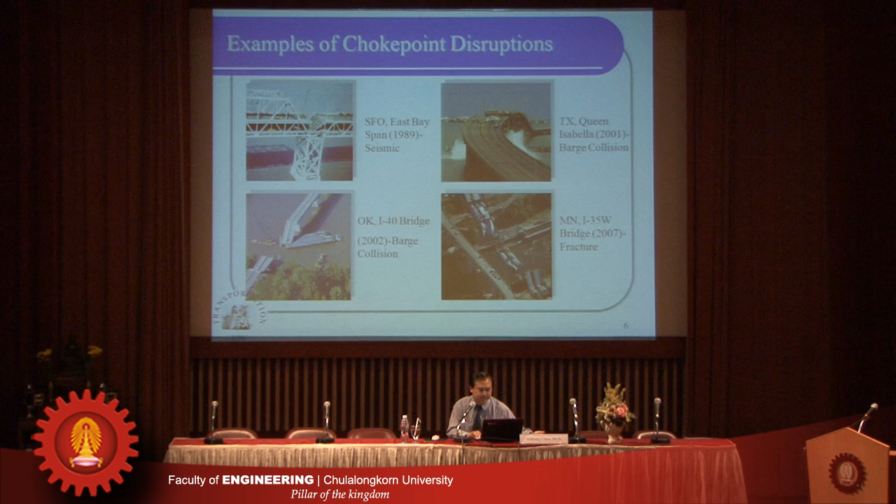Yeah, so these are potential choke points that can cause quite a bit of delay. I will focus mainly on this kind of choke point disruption for the freight analysis. Okay, so here is the research framework.

To do freight analysis, you basically need two types of input. One is the truck origin destination trip table, and this one is actually very difficult to get.

Later on, I'll show you a method of how to estimate this truck OD trip table by using an existing database in the United States called the FAF, which stands for Freight Analysis Framework. This is probably the one that will have the most error. Dr. Park talked about the significance of this truck OD table in his talk, and during the coffee break I asked him how they actually got it.

There are two ways: one is by commodity flow, and the other is based on truck trips. It depends on what kind of data you have — you may use either one or both. Even if you use both of them, there's still going to be a lot of error.

What I will show today is one way of estimating this using commodity flow data provided by the Federal Highway Administration in the United States. We have to make a lot of assumptions and also make use of a lot of other databases to actually estimate this. The other input is the transportation choke point.

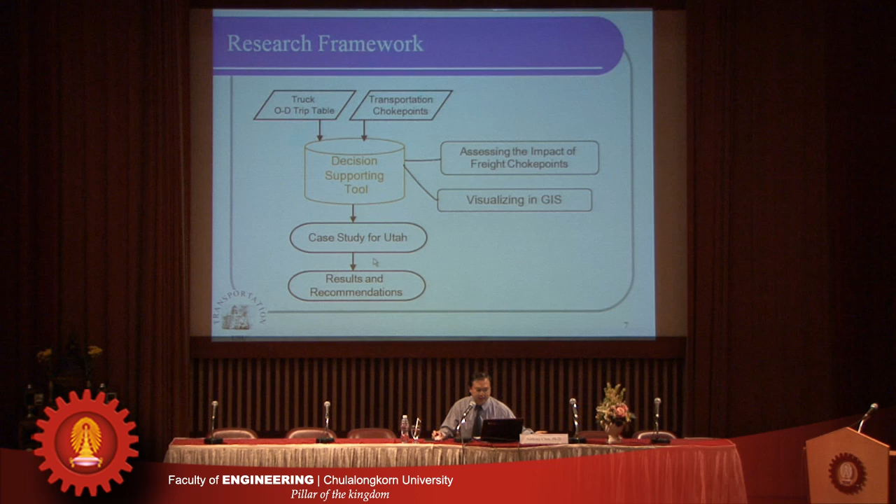We will be using a case study for Utah, and based on that case study, we can make some recommendations to the DOT.

Okay, so this is what I was talking about — how to estimate a truck OD trip table from a commodity flow database. There are actually a number of steps we have to carry out, and basically the database we are using is called FAF.

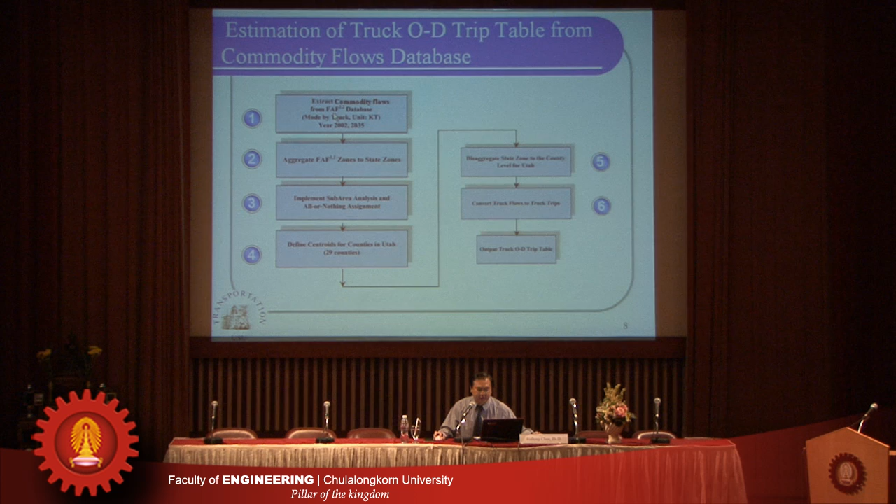So I have another slide for that. This is the Freight Analysis Framework database, an integrated database of national and statewide data on freight shipments, categorized by many different things like origin and destination, value, weight, mode of transport, distance shipped, and ton-miles of commodity shipped. So there's a lot of data in here.

The one we're using is actually by value and by weight, to estimate the truck OD. It's conducted once every 5 years, the same as in the Korea case. The one I'm using is from 2002, and the 2007 version was just released this year.

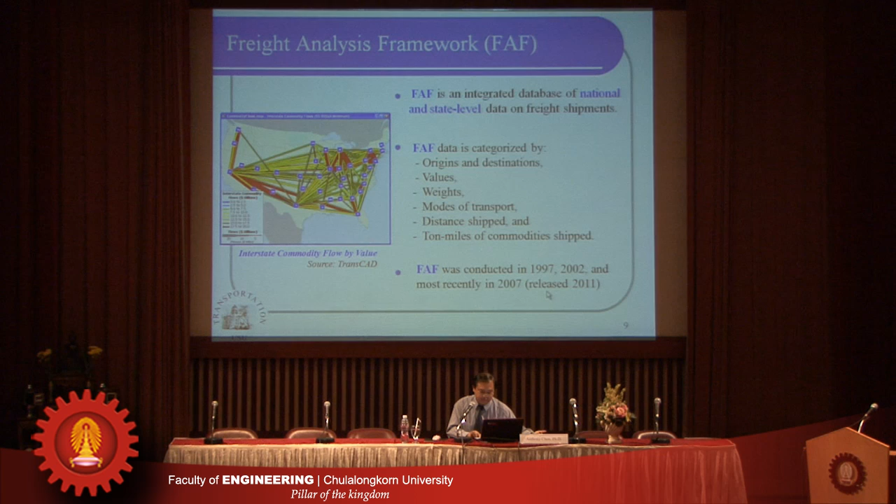So the first step is to extract the FAF commodity flow by weight, in terms of thousands of tons. There are different modes, such as domestic, water, or border, and what we're interested in is mostly the domestic one.

So we extract the domestic flow using only the truck mode. Remember, there are many different modes, so we only extract the truck mode from this particular database, for all the states, and then we convert that to just a given state, Utah.

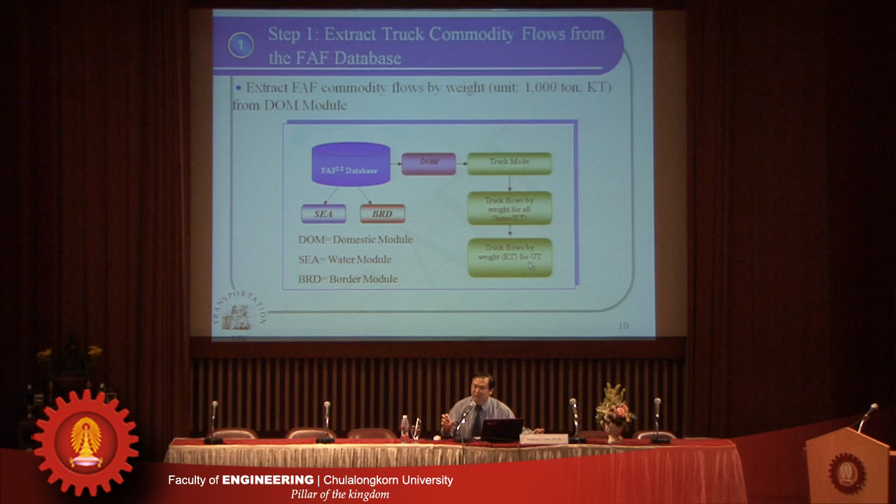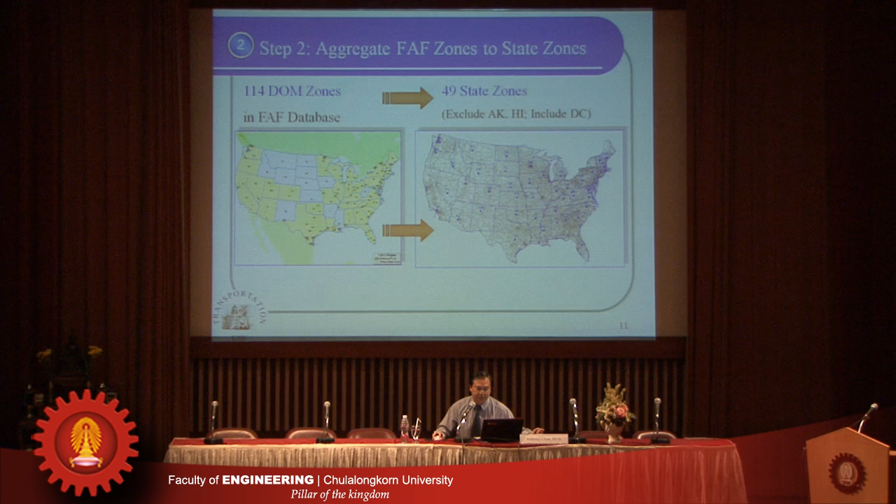In the original FAF database, there are 114 domestic zones. What we do is first convert that to 49 state zones. This excludes Alaska and Hawaii, but includes Washington, D.C. as another state zone — that's why there are 49 instead of 48.

And then what we need to do is estimate the flow for just one state, which is Utah. To do this, we need to estimate 4 different types of truck commodity flow.

Basically, there's I to I, which is within Utah as both origin and destination. Then I to E and E to I, which is from Utah going outside, and from outside coming into Utah — these we can obtain from the FAF commodity flow. The only one we don't have is traffic passing through Utah, the E to E, so we have to develop a method to estimate these through trips.

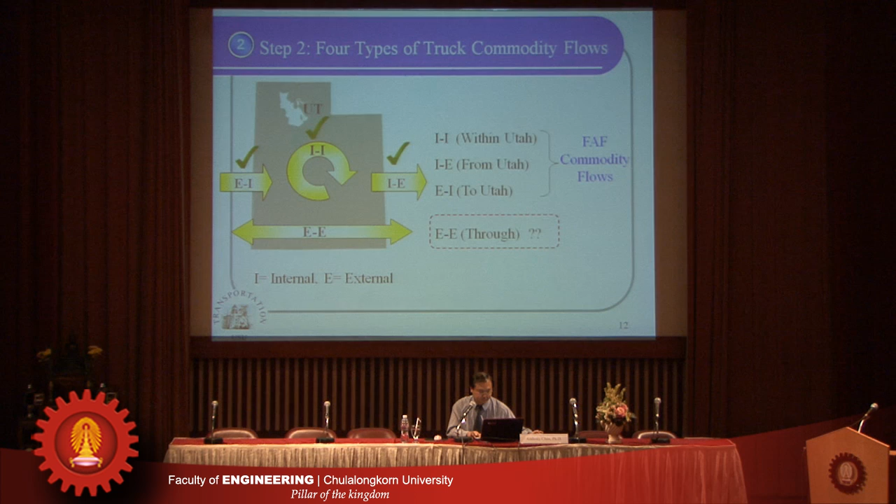Okay, let me talk about the matrix first. Here, the internal Utah is just one zone, so the size of this matrix is just 1 to 1. And then we have 48 other states, so the I to E is 1 to 48, and the E to I is 48 to 1. And the through trips is 48 to 48.

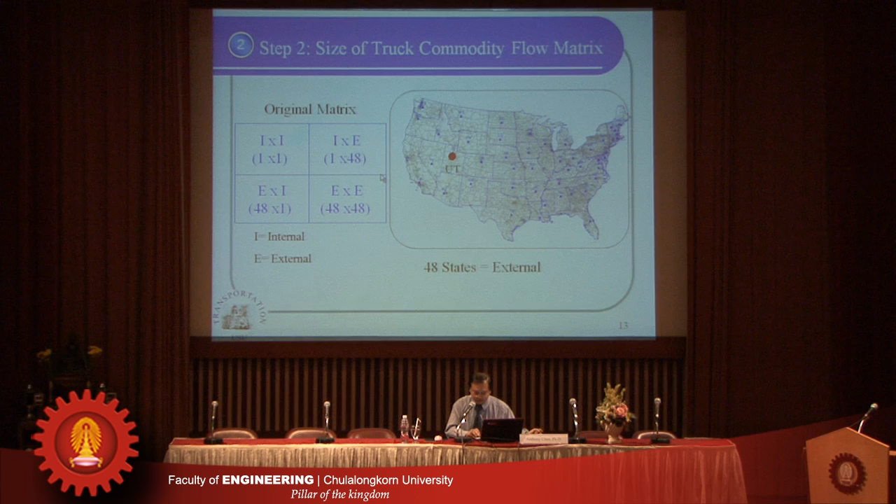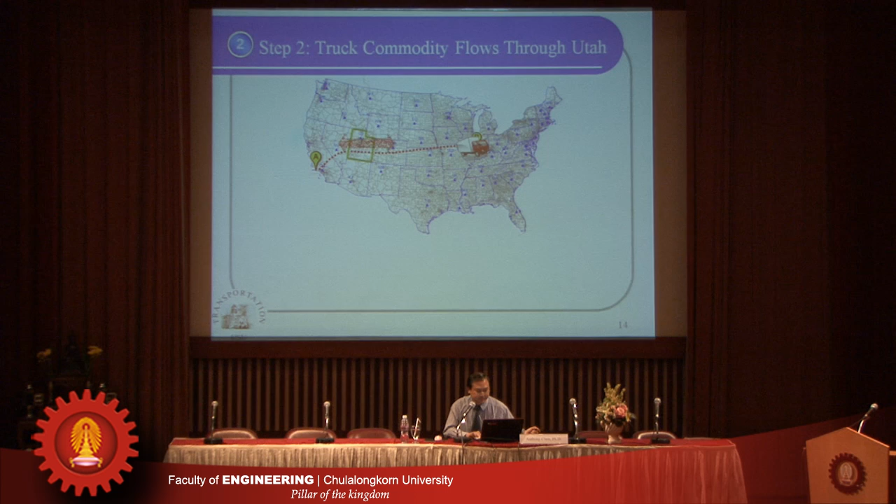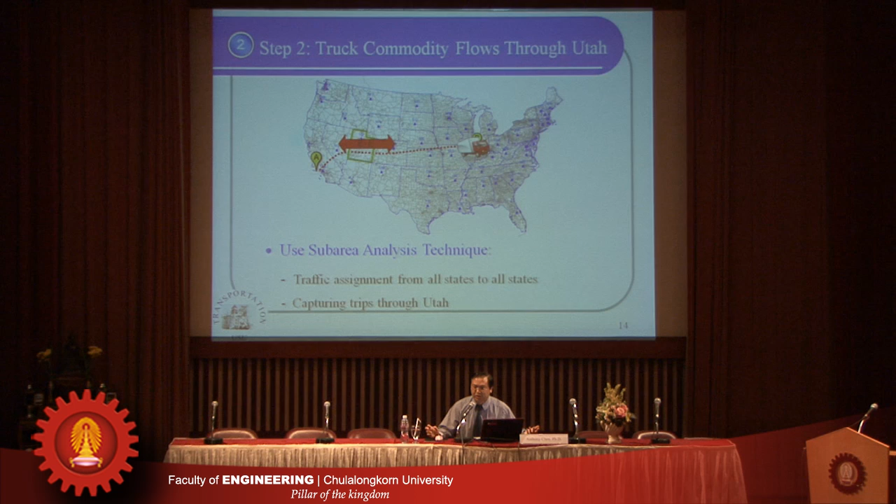So we need to estimate this first. The way that we did it is we look at all possible combinations of state as the origin and destination and do a traffic assignment. This way we capture the through trips. So basically the methodology we're using is a traffic assignment, which is a standard step in the 4-step forecasting process, the last step. You can use any software to do that.

Then we run a sub-area analysis. To run the sub-area analysis, these 48 states got aggregated into 19 external zones. These are the points that go into Utah. So we use a software called TransCAD, and they will estimate these external stations within the software, so you don't need to define it.

So now our matrix is basically 20 by 20. What we need to do next is disaggregate this, because if you only have 1 point to represent the whole state, you're not going to represent the truck trips well. So we have to disaggregate this.

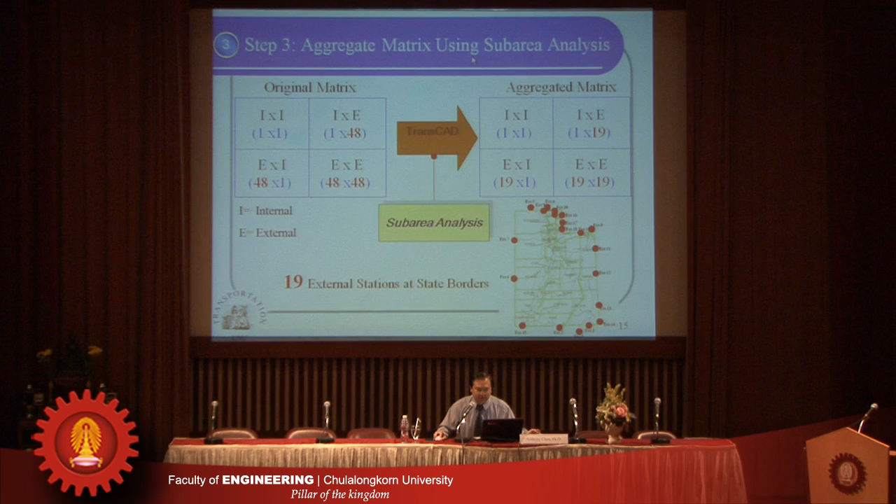And the way we do it is to disaggregate according to county in Utah. So just like in Thailand, I guess there are how many provinces? 76 provinces? So you would disaggregate into 76 provinces.

Okay, so in Utah there are 29 counties. So the Utah state originally was 1 to 1, now it got disaggregated to 29 by 29. So basically we have 1 zone per county. Right now the final matrix size is 19 plus 29, so it's 48. So the whole matrix is 48 by 48.

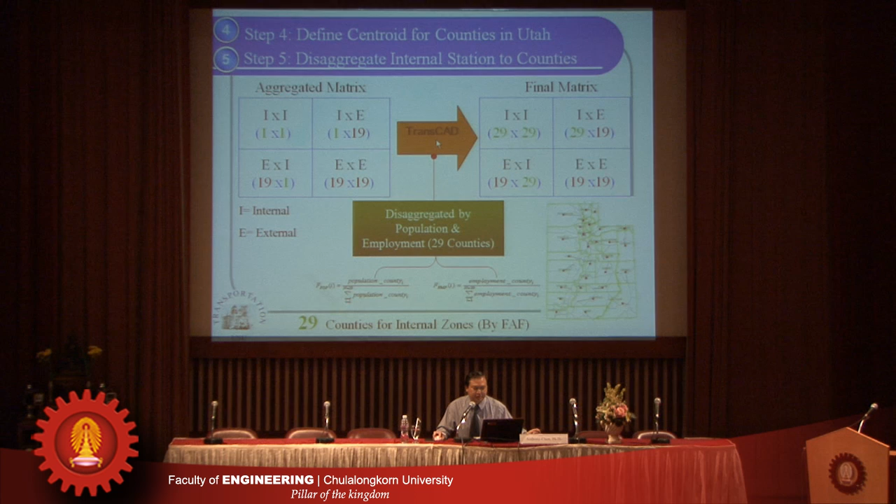And to do that, what we need to do is use the database from the Utah Governor's Office to get the population and also the employment. Using this database from the state of Utah, we're able to disaggregate according to the population and employment.

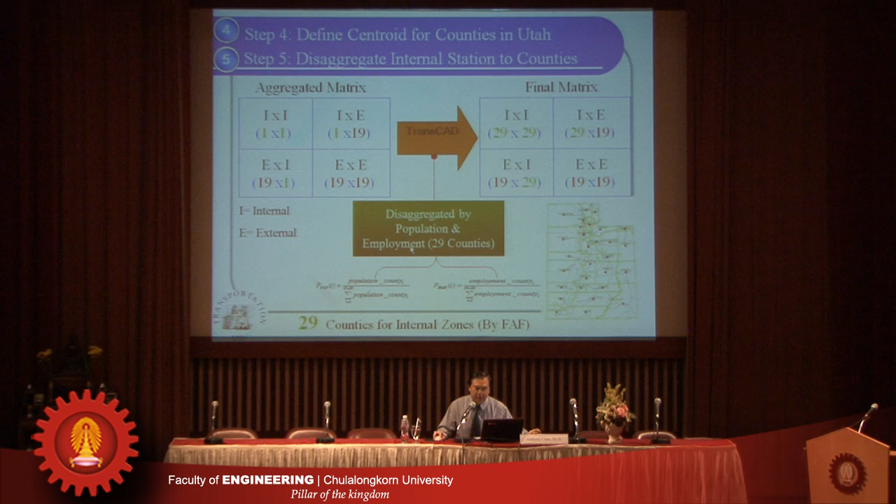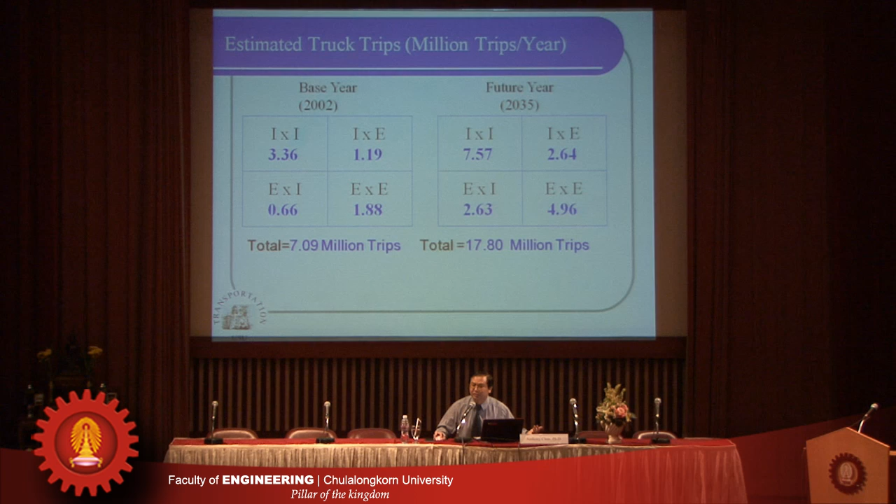And then we run that estimation. So for the base year, these are basically the number of trips per year. In the base year 2002, the total is about 7 million trips, and within the state of Utah is about half of it. For the future year 2035, the total number of trips is more than double. Recall in the beginning I showed you the increase is 150% for the whole United States, but for Utah it's more than 150% increase, so it's higher than the national average. So Utah is concerned about this increase in truck traffic in the state.

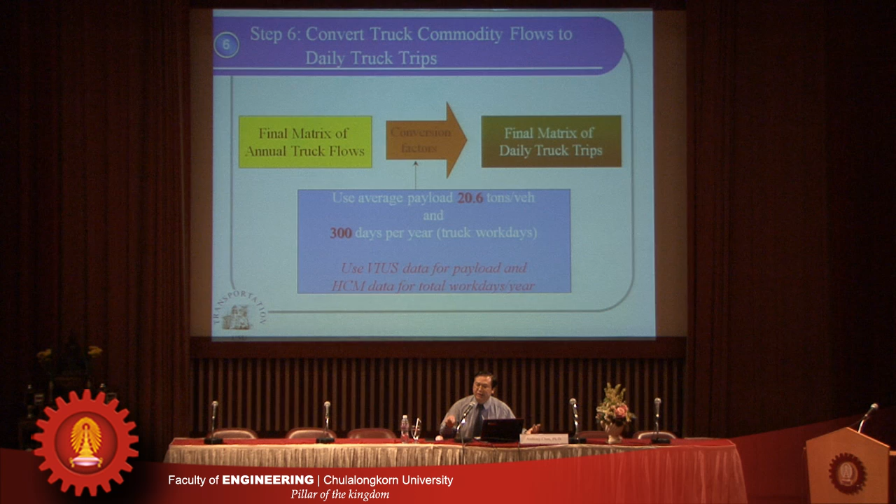Okay, so that is still in commodity flow. The next thing we have to convert to is the truck trips. So up to step 5, everything is still by commodity by weight. This step is to convert the commodity flows to the actual daily truck trips made in Utah.

In order to do that, we have to use again 2 different databases. One is the VIUS data, which gives you the payload. In the US, when you enter a state you have to go through a port of entry, and the truck has to be checked and weighed—there's a weigh-in-motion to weigh how much the truck weighs. What we did is use the average weight, which is 20.6 tons per vehicle, to convert the commodity flow. The previous slide showed annual commodity flow trips, so we have to convert it to daily trips.

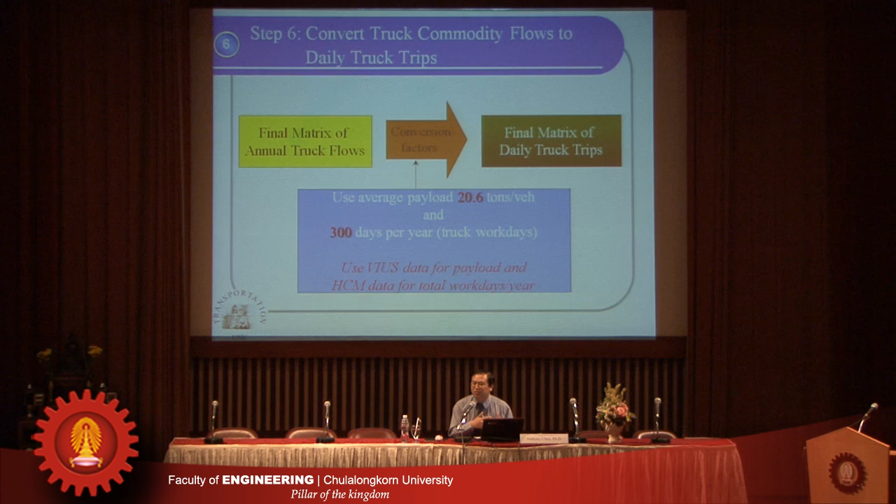And according to the Highway Capacity Manual, the total work days per year is 300. I don't know exactly how they came up with that number, but that was suggested by the Highway Capacity Manual. So you can see to do this procedure we have to use many different databases and make a lot of assumptions.

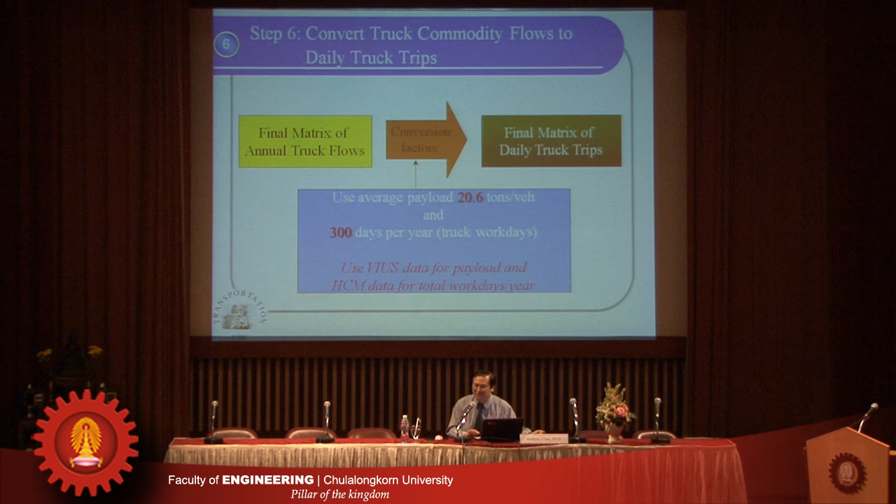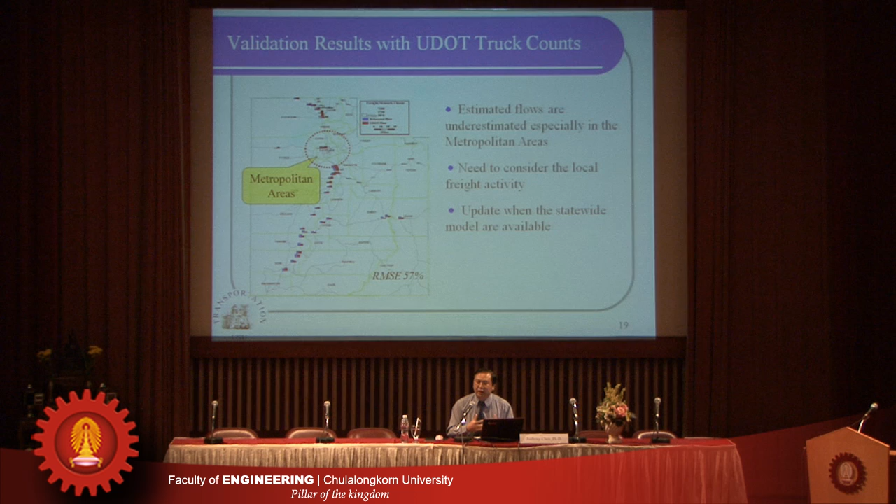And this is the same as in Korea, like interregional, you're using commodity flow, and within the urban area, you're actually using truck flow, right? So I think there is a need to actually integrate these two approaches, and we're thinking of a way to do that by integrating both the commodity flow that we obtain from the national database, and also the truck count that we obtain from the state DOT.

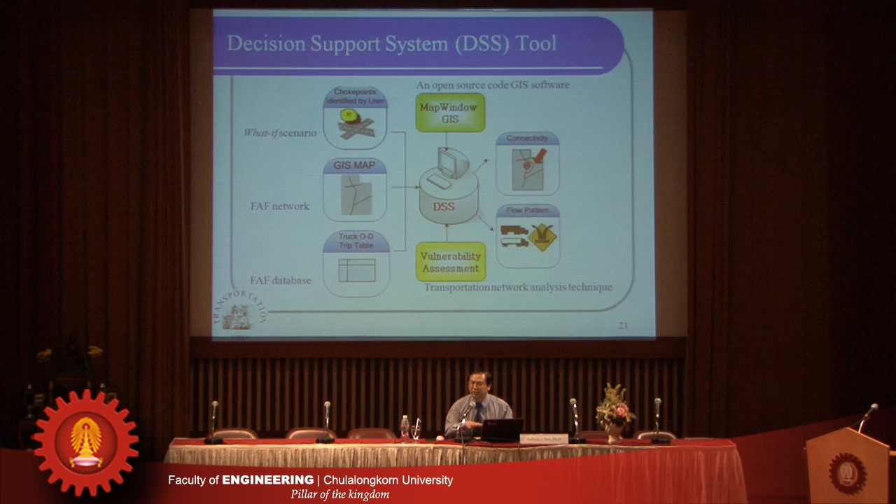And the way we're going to evaluate the vulnerability, basically we will be using two measures. One is connectivity - what this means is that if certain bridges or roads are disrupted, can I still go from point A to point B, or what is the detour route? And the second one is the flow pattern, which will make use of the truck OD trip table. So we will assess, if there is a disruption, how does it change the flow pattern of the truck? These two are actually complementing each other.

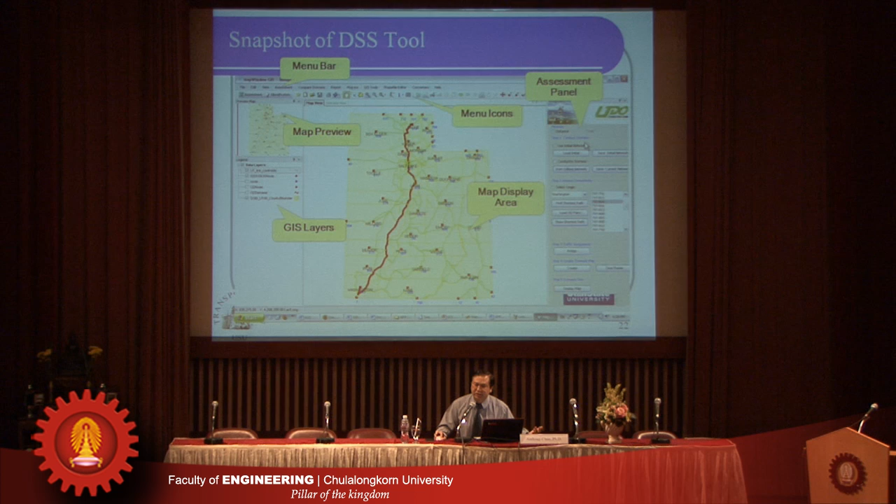So this is just a snapshot of the decision support tool. You can see that it's just like any commercial package - you have your menu bar here, your menu icons, your preview map here, and this is the different GIS layers, and this is the main display area. Over here on the right is the assessment panel, so you can do different analysis, like whether it's connectivity or freight flow pattern change.

And as I said, the decision support tool has full functionality, so when you want to change some attribute of a link, like say for example if you want this link to be a choke point, all you have to do is click on it and then a table will pop up, and then you go to this column and change it from enable to disable, which means that link will not be available for the analysis. Okay, and then you just save it. So the input is actually quite user-friendly.

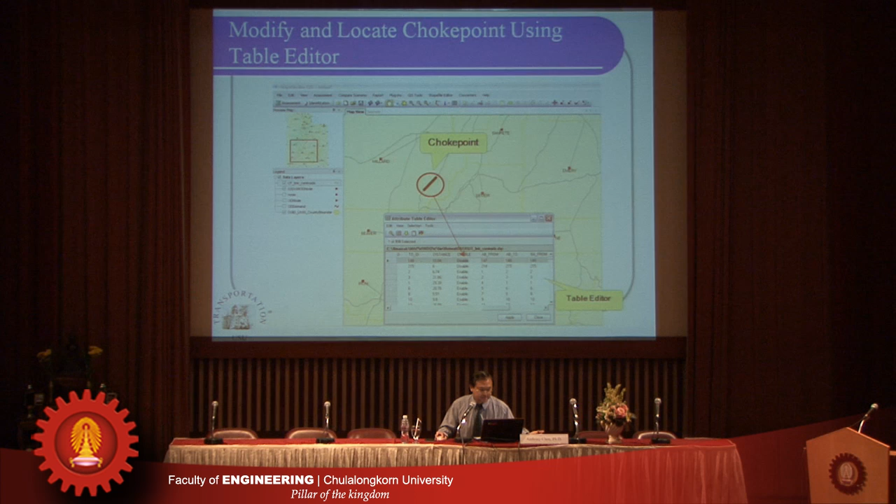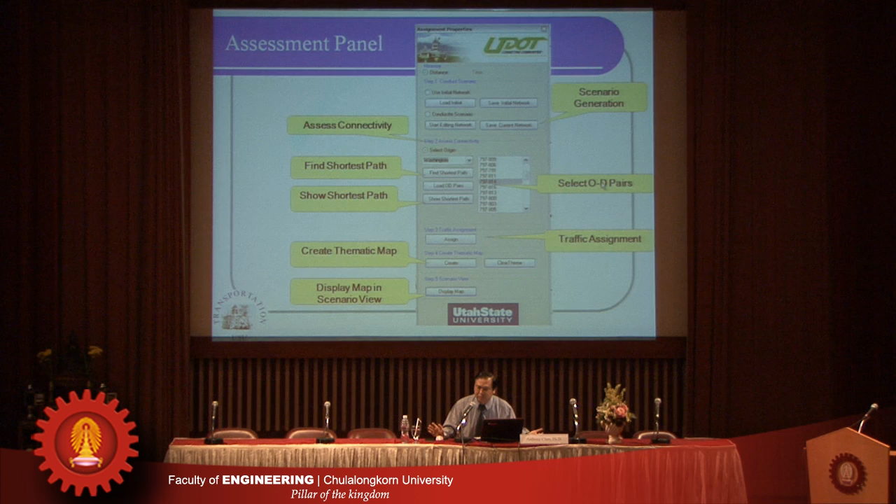And this is the assessment panel. Basically, there will be a number of steps, and what you have to do is just follow step by step. And you can also view, say for example, you want to view a particular origin destination pair - what is the route, what is the detour route, you can also do that. So I'll show you that.

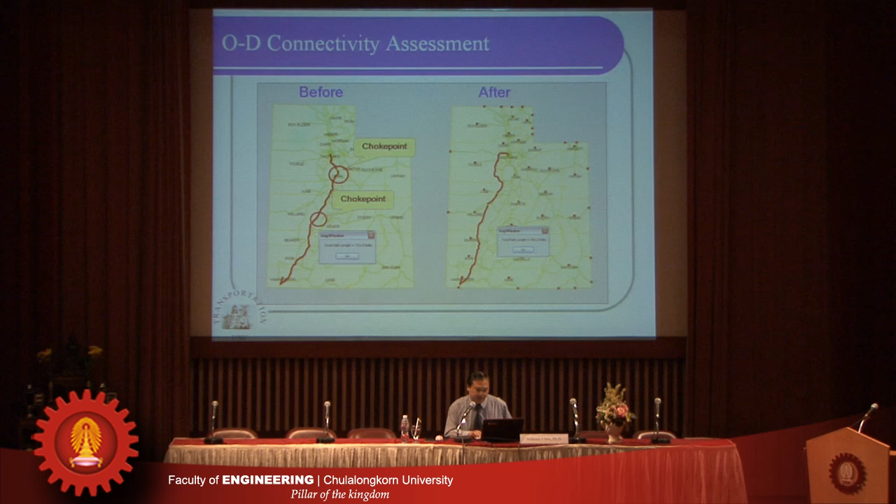Okay, and you can do that for each individual OD pair, or you can do it for a group. So later on, I'll show you as a group. And this is the freight flow pattern.